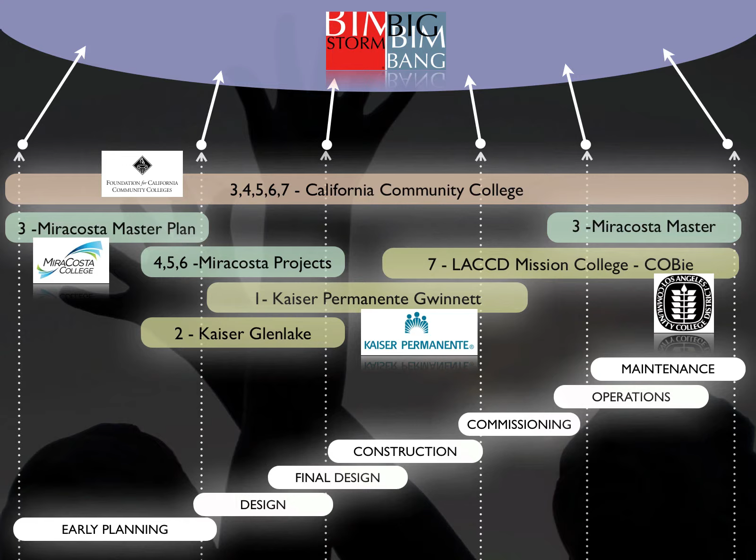We have recordings from previous webinars, but we outlined the types of projects being focused on in this BIMStorm. We have the MiraCosta Master Plan. We have 2 projects from Kaiser Permanente, the Glenlake project and the Gwinnett project. Gwinnett is under construction, Glenlake is in early programming. Los Angeles Mission College is focusing on COBie, going from construction into facility management, and the MiraCosta Master Plan is ongoing in draft format right now.

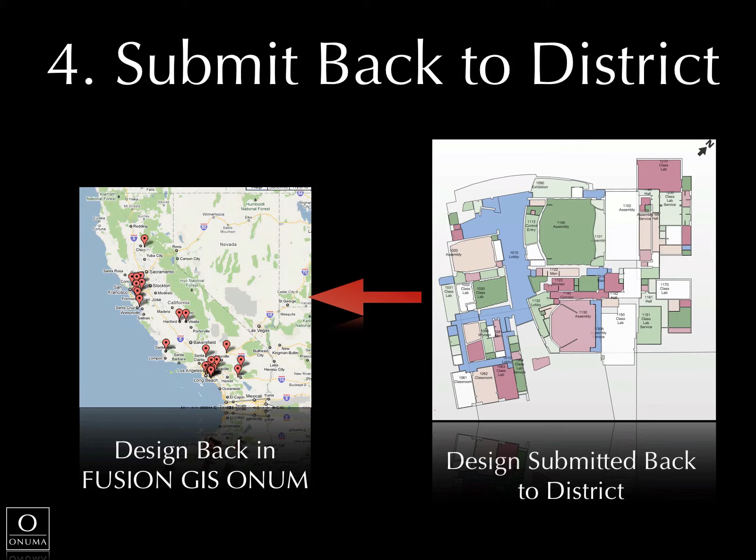In the California Community Colleges, we have a lot of districts. We're focusing on 2 districts, MiraCosta and Los Angeles Community College. Today we will be looking at programming. There's 2 projects on MiraCosta where we have programming requirements going into design. Those are being submitted as part of the BIMStorm from MiraCosta in draft format, and the owner in that case is looking for how to review the designs as they come back into the different systems being used and compare the results.

Today we're going to be starting with MiraCosta College. We have HMC Architects, who are the MiraCosta College owners representative for the master plan that's ongoing. It's in draft format right now. Deborah Shepley, the principal and community college practice leader, and Dave Rova, the design principal, are going to be joining us, and we'll be explaining a little bit about where the master plan is.

There's a website actually that's available to the public where you can get the draft version of the master plan, and there's some presentation videos there so you can see a little bit of the background. What we're doing in the BIMStorm is MiraCosta College has allowed us to use this information as a background to define the projects that we're going to be focusing on. There are actual projects defined in the master plan, but in the BIMStorm we're using them as a way to engage the teams to participate.

So Deborah and Dave, are you ready to speak? Certainly, great, yes, we're here. Well, thank you very much for joining us. Maybe you can give a brief introduction of who you are, what you do, and what you've been working on at MiraCosta. Then we'll open up the plan and take a look at it together.

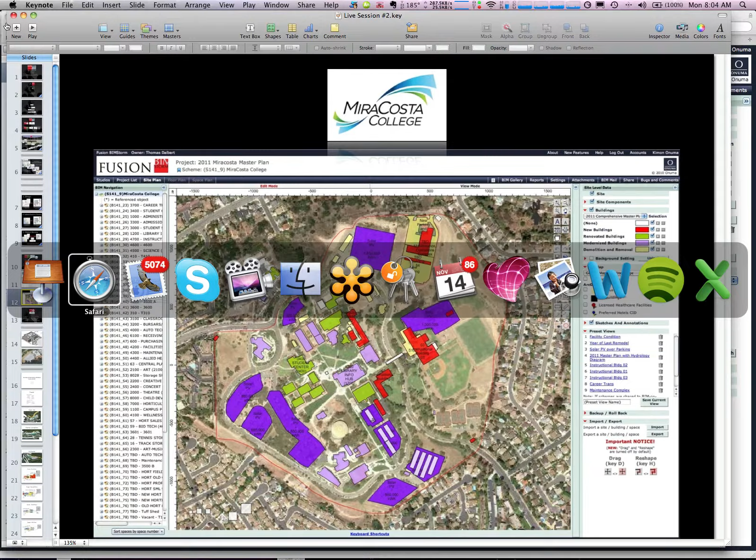Sure, I'll start, this is Deborah. About a year and a half ago, we were hired by MiraCosta College to develop the comprehensive master plan, and it's comprehensive in that it involves both the educational planning as well as the facilities master planning. We are in the final stages of this comprehensive master plan. In fact, the final report was printed last week and will be brought to the board this week for approval.

So just a couple notes: the master plan is a result of a lot of forward-looking thinking in terms of not just the facilities and the campuses within the district, but also where the educational programs are going, where the enrollment is going, and what their big institutional goals are. All that information, because the first half of the planning process is really focused on the educational plan. We worked with the Collegiate Brain Trust under the leadership of Eva Conrad leading that effort, and then we've translated all that information into the recommendations that you see on the campuses right now in terms of what will happen to each of the 3 campuses within the district.

So on the plans, we basically have recommendations for new construction, renovation and repurposing of existing space. A number of buildings have been removed, and there are a number of site improvement projects on the campus as well.

I'm not sure how much more you'd like. Well, that's great. Maybe I could ask a few questions and kind of frame...

The planning scenarios we're setting up here: what we see on screen is an image from the master plan inserted into the tools we're using to organize the BIM storm, the Onuma system tool. We also see a blue outline identifying the focus area. We're not looking at the whole campus, though it's available for reference. We'll be focusing on two buildings: instructional building III, basically an athletics facility gymnasium, and the maintenance operations building for facilities, plus an area identified for potential solar photovoltaics.

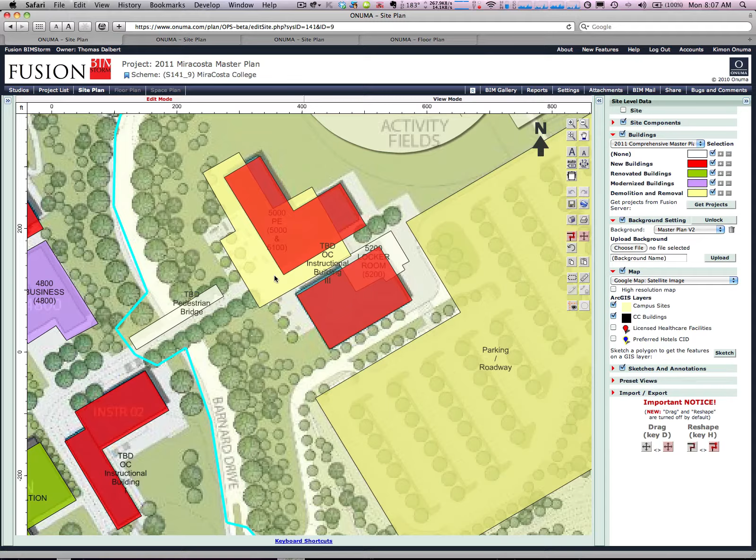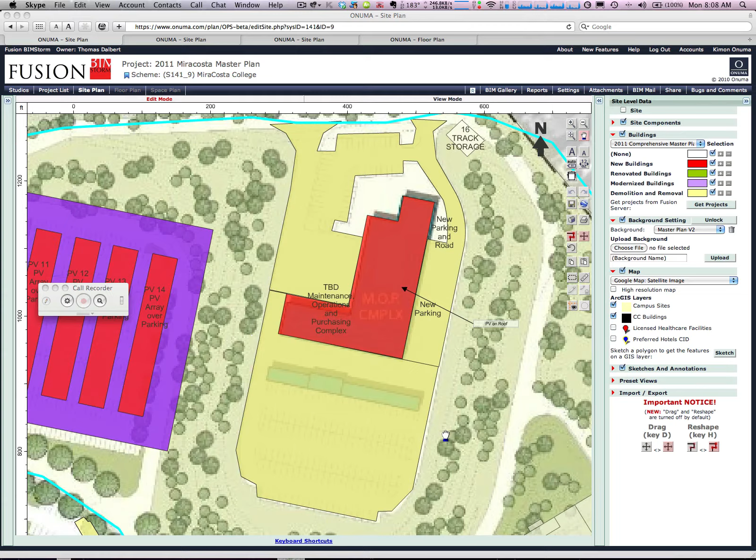The maintenance and operations purchasing complex is interesting because it's sitting within what used to be a stadium, or what is currently a stadium bowl. The college wasn't using that land—it was a track and field, but very underutilized. If you look on Google Maps, you'll see the sloping seating area all the way around. It's a really interesting spot because that's been the recommendation for where the new maintenance and operations complex will go, to utilize that area and pull it out from the middle of the campus.

So the interesting part is looking at the visual connections and also the vehicular and circulation connections within that bowl over to the campus.

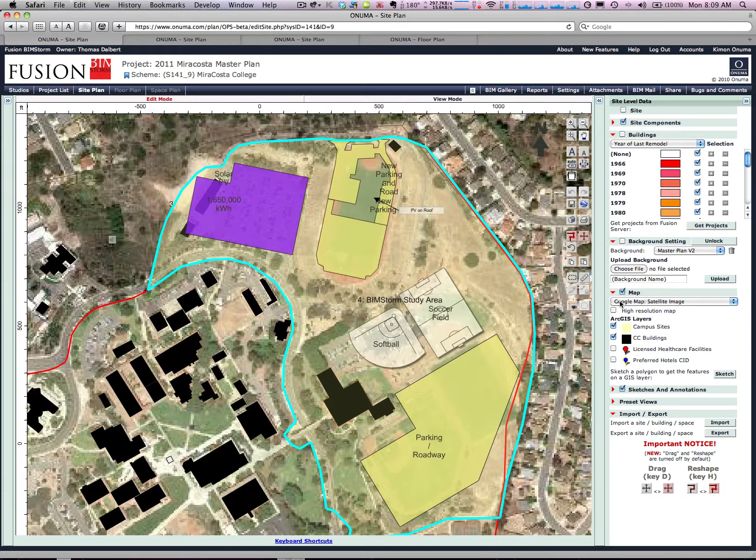And Dave, anything you'd like to add? Yeah, again, in a master plan, we're talking about setting a stage—setting up something for the future as well as plans for today. Architecturally, what you'll see in the models and in the BIM storm right now are really diagrams of locations of these buildings, with a little sculpting, but in reality these things will be brought up as projects in the future. So what we've done is set ourselves up with this stage to create something the campus really desired from the beginning: destinations. Not just destinations of instructional space and academic program, but also destinations for students and student life.

So as we're replacing a bridge that connects two parts of the campus, it really isn't a bridge anymore—we're creating a terrace, an area where students can gather and have a sort of classroom outside the classroom. We're separating buildings and creating massing that would stage terraces and plazas in front, to make it a much more active zone.

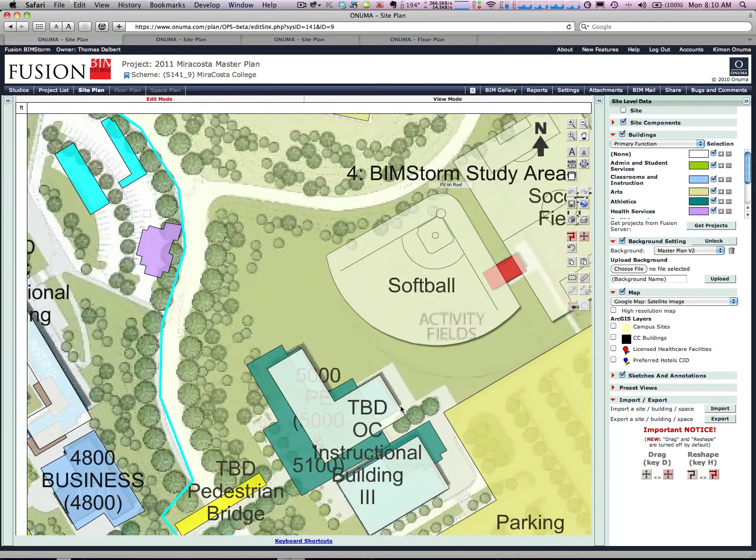The area we're concentrating on within the blue—this instructional building—is really a gymnasium and dance studios and areas like that which are active, and it would be able to draw students to this area and these facilities if we were to create more indoor-outdoor spaces, not just interior programmatic spaces.

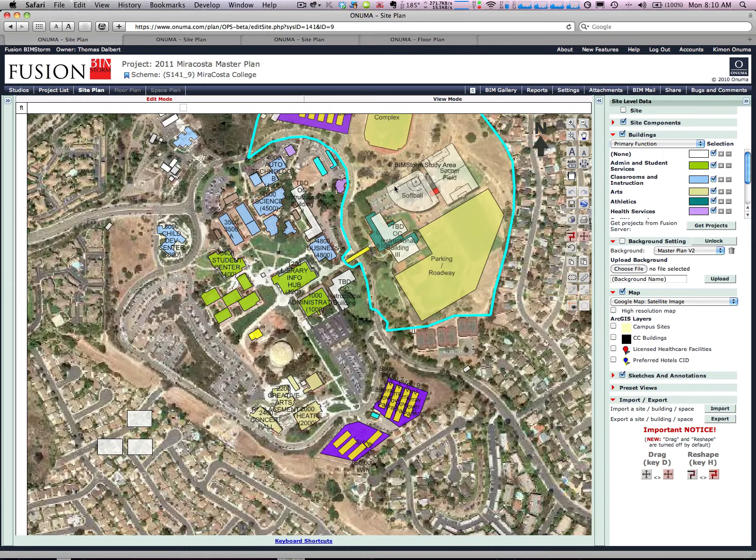This new master plan really links the campus. If you notice on the Google map, we now have large parking zones that connect not only on the perimeter of the campus but also in the area we're dealing with. So these connections of people and program are really important here.

So as you're looking at this, really think about it from the clientele perspective and the stakeholders—from the students to the faculty—and how these areas are really staging themselves. How's that?

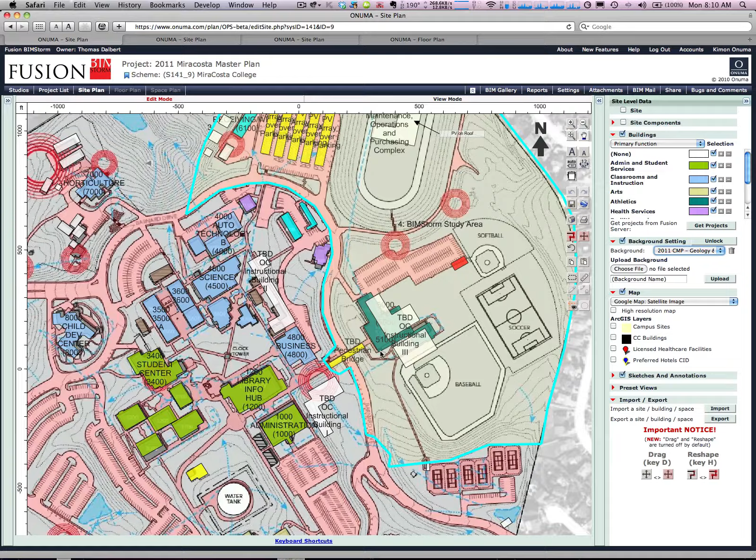Kimon, is that the level that you're interested in? Yeah, that's great, thank you very much. Any specific questions? Yeah, it triggered some questions based on what you were just saying.

You mentioned the pedestrian bridge, the link. It's actually a very interesting bridge because as you're entering the campus, you notice this bridge, you drive underneath it as you're coming in, and then you loop around and get into the main campus. So it's kind of an entry point. Is this part of the plaza? Can we assume that this bridge can be part of this project, as teams can work on it as a design element?

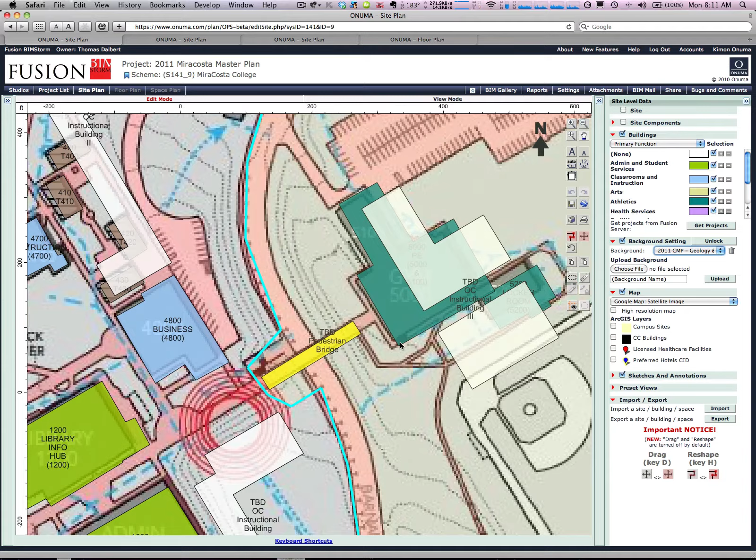It is a design element, that's correct. And it is within the blue area, so as you have it shown, it does show like it would be part of it. Because the plaza in front of the instructional building then reaches across this wide bridge, which is more of a plaza. That's a very interesting kind of design element.

The other thing, just so the teams realize, there is an existing building here that is in disrepair, and is proposed to be replaced with this new building, the instructional building number 3, which is an athletic facility.

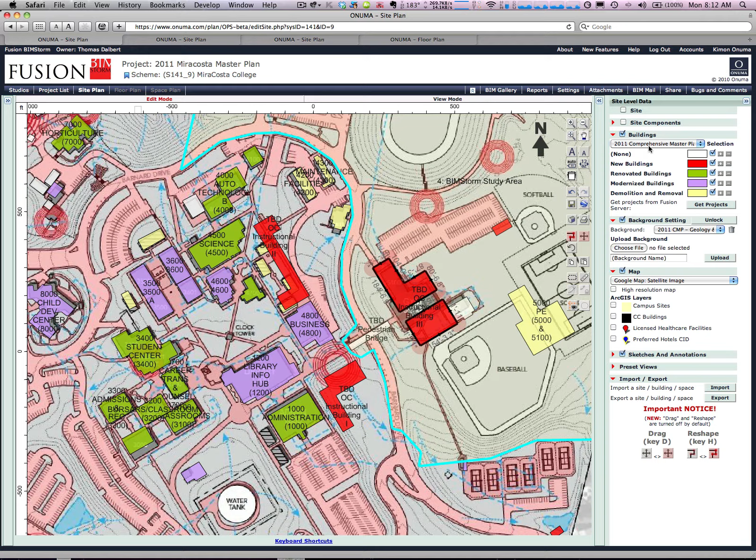So that's kind of part of the exercise here, is how do we update this, make this bridge part of that design element, put this program in for the new building, site it correctly so it fits within the planning document that you sent me last week, so it shows the connection between the existing campus and the proposed building here.

And so this existing facility is actually going to be, we can basically just place it off to the side here. This is going to be demolished.

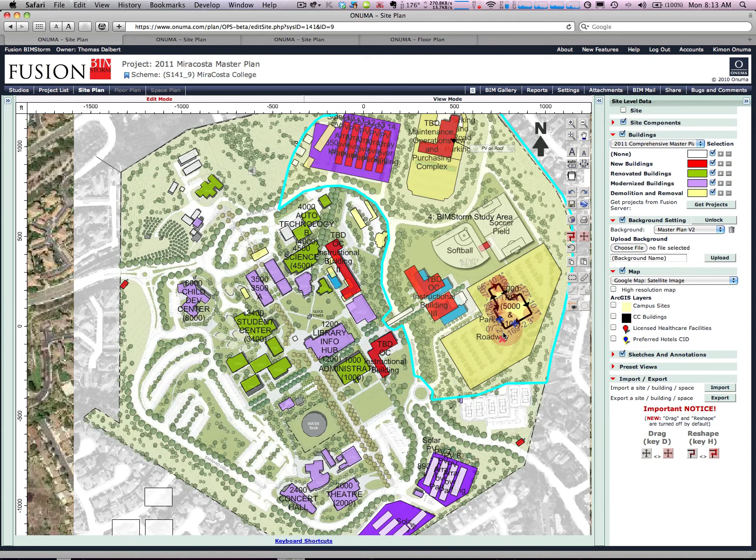Yes, and Kimon, one more thing on that. We've actually staged this or phased this portion of the project in the master plan so that the existing facility is in operation while we are building the second portion of the facility, its replacement, or the gymnasium portion and locker portion. Then phase 2 would be demolition of the existing facility and then bringing in the dance studios, fitness training centers, offices, conferencing, and all of that.

Okay, that's interesting. So we have this proposed facility in red, the existing one in yellow. Are you suggesting that maybe the gymnasium portion gets built first while this one's still in operation, and then it phases over to this part? Yes, that was in the plan, yes.

Okay. All right, we have to look at some of the alignment here because this is always a challenge when you have a lot of different background data. We have the Google map, and then we have the image. Let's turn on some of the higher resolution Google map. So we're trying to get things in alignment.

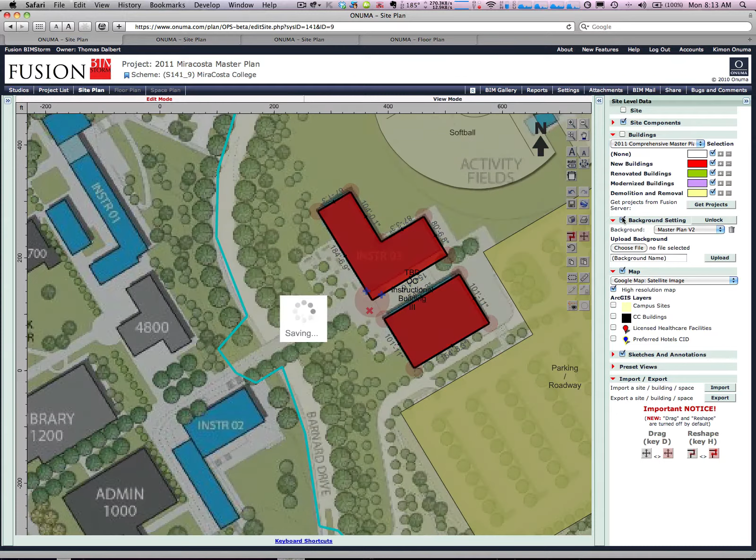The other thing that's interesting on MiraCosta, that's a correct pronunciation, by the way. I guess I was correct last week. It's MiraCosta, correct? Yes.

There is actually GIS, or Geographic Information System, data available. We don't have it shown here in the map yet, but hopefully we're going to get some more detailed data that might show us the exact alignment of the bridge and the buildings.

So this proposed building, the idea is that it would be on axis with the pedestrian bridge, and there's an existing building shown here, and I'm not sure if this is the exact location. We're using the GIS data that's available from the district to place that. So there's some study that needs to go on about how the sequence is.

So that's a very interesting thing that you talked about, of keeping the existing building in operation while this new one comes in.

We also understand that there's a realignment of the ball fields here that are right now in what's marked as proposed parking. So the parking is coming in here. The ball fields are moving to the north of that. I think we discussed that solar...

Kimon, this is Young. Let me just interrupt you real quickly. I think your screen may be stuck, so you may have to... I'm not sure if you're changing your screen, but nothing else is happening. Oh, okay. How's this? I just refreshed. You can see the master plan on it.

Okay, what do you see now? No, nothing is happening. Okay, there we go. Oh, that's strange. It was stuck, I guess.

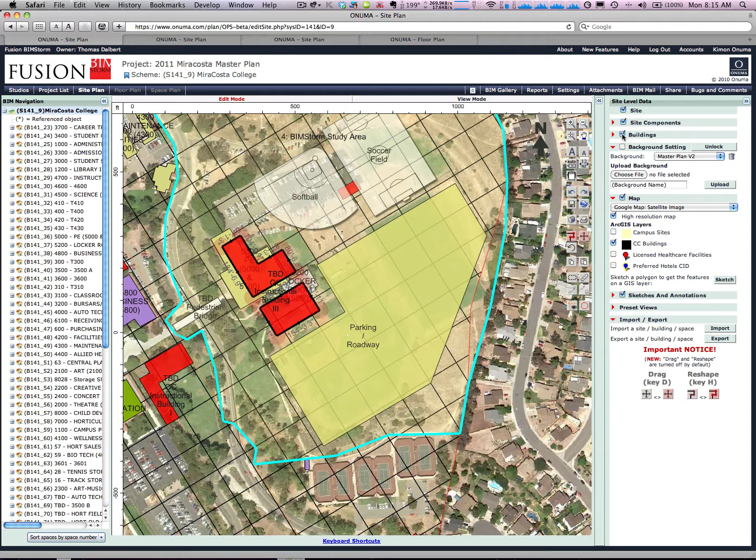So I was talking about this existing building, the proposed building, and the bridge across, and the existing versus proposed parking that's taken over the existing fields. If we turn off the background map, we can see the existing fields are there, but the proposed fields are actually moving to the north.

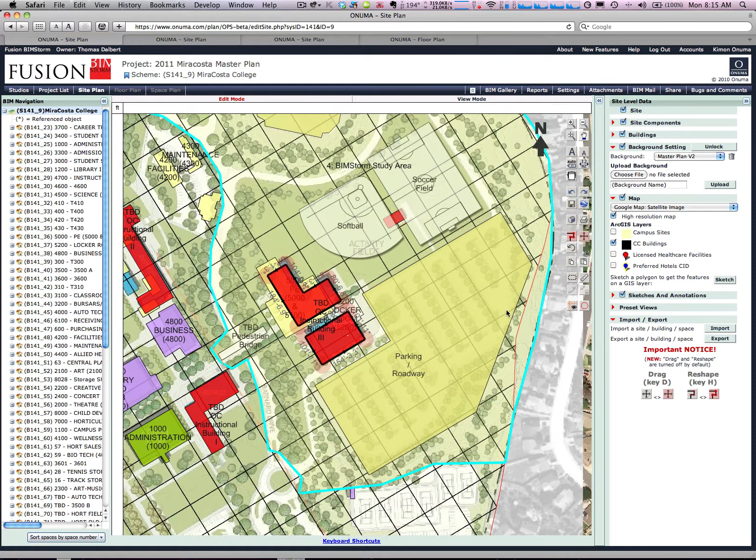The parking has taken over the existing area here. Deborah, you mentioned this parking area is not open for solar photovoltaics because of potential issues with the neighbors, so we're not proposing solar PV on this parking, but we are proposing it on the northern parking area up here. Let's move on to that.

The purple area here is proposed solar photovoltaics. There was a question last week from an engineer in the audience saying the alignment of these is probably not optimal if this is truly north, so it's a question of how to configure them, whether east-west or north-south, and that's going to be up to the teams to propose. We just placed them here as a concept for this project of placing solar photovoltaics.

In fact, the layout of the parking lot, as well as the whole design of the PVs, is open. And it extends beyond to the left area where that purple is, because those tan buildings are going away, so there's more room there.

So we could say it's possibly better to go this way, since these tan buildings are being demolished and moving away, giving us some more area there. This is another study area for a team that is very familiar with how to lay out parking and solar photovoltaics.

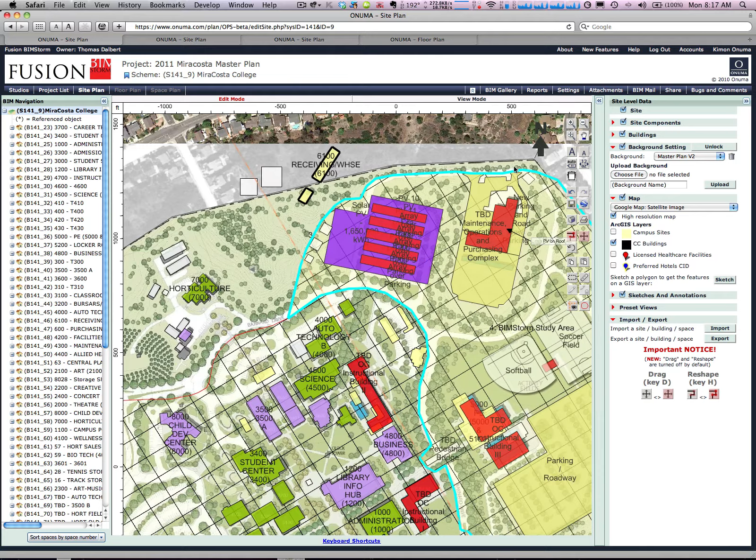Keeping in mind, there is an important access and circulation to the top, off your screen right now, that connects over to the maintenance and operations complex. The road continues above and then down across the back. You're talking about right here?

Yes. So the circulation on this whole study area is interesting because there's vehicular circulation, new parking, new buildings, this bowl area that the maintenance and operation building sits in, and an upper area for activity fields.

So how does the whole vehicular and pedestrian circulation work on this side of the campus? There's an axis defined in your master plan for how this parking area connects back to the main campus, so there's a very interesting dynamic being set up for the teams here.

All right, let's see a couple more things here. So we have this set up in the Onuma system. This is going to be made accessible to the teams, and the workflow we're studying is kind of interesting. This also just came in the last couple of days, but the way the community college sets up projects for funding and defining projects, they're called initial project proposals.

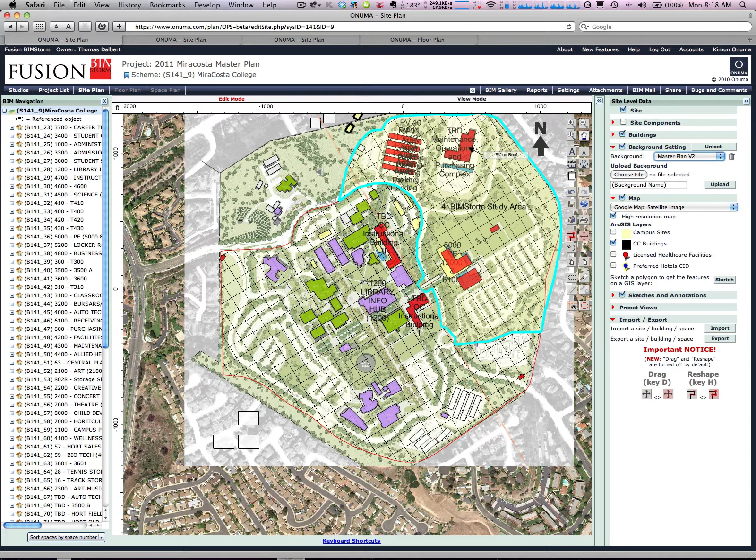Let's see, there's a question coming in. Is this the latest site plan? If so, what happened to the athletic field, baseball, soccer? The athletic baseball and soccer fields are being moved right here - the new location of the soccer field and the new location of softball or baseball.

Yeah, go ahead, I can answer that question. Those fields show how that area could be configured, but the activity fields are meant to represent activity fields to be determined. What's happening here is they're changing some of their fixed fields and creating more multi-use athletic recreation areas.

So on the master plan drawing, right now we see softball and soccer. That's not specifically how it would be laid out. It would be more like what's shown on the master plan drawing you had prior - as an open field area where multiple activities could take place.

So like this - not really a layout like this, it would just be an open field here. Correct. So we could actually probably remove these, but they do show up as a suggested area, though it's a big open area basically that can be multi-purpose. You can understand the scale by bringing those in.

The other question was, since you have a sloping area, why not stack the parking to free up more athletic field space? I'm assuming this question is talking about the area over the maintenance and operation building - this is a bowl here, correct? Or are they talking about this area here? I'm not sure. It's probably the area to the front or below the red new building.

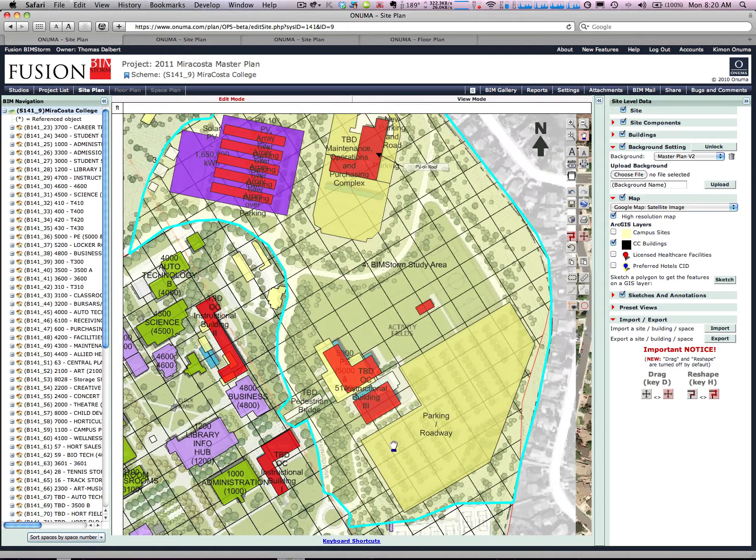Right here? Within the bowl. No, further up, in the bowl area.

During the planning process, that entire bowl was looked at as one area to create structured parking. But due to the cost, it was chosen not to pursue that, although it might be something to consider in the future.

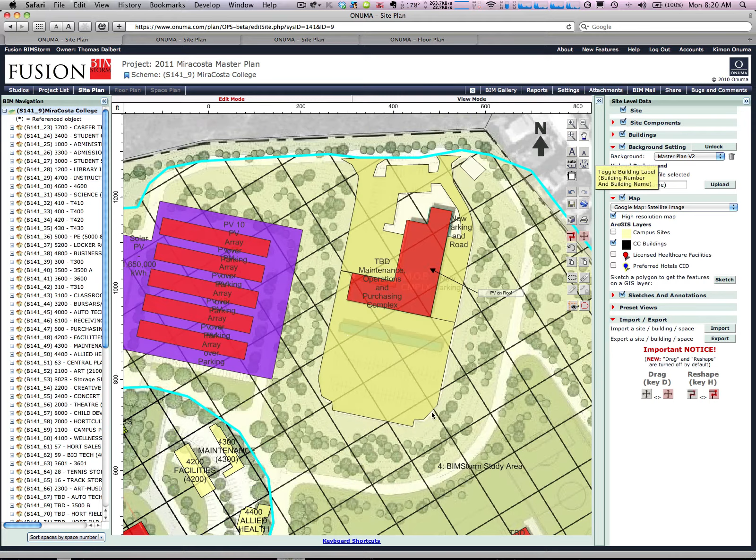They were able to get the complete target number of parking just using surface parking, which is much less expensive and more cost-effective. So the solution was not to build structured parking, but that area is being held in front of the complex just in case it's needed in the future.

So there's some studies that could happen there as well.

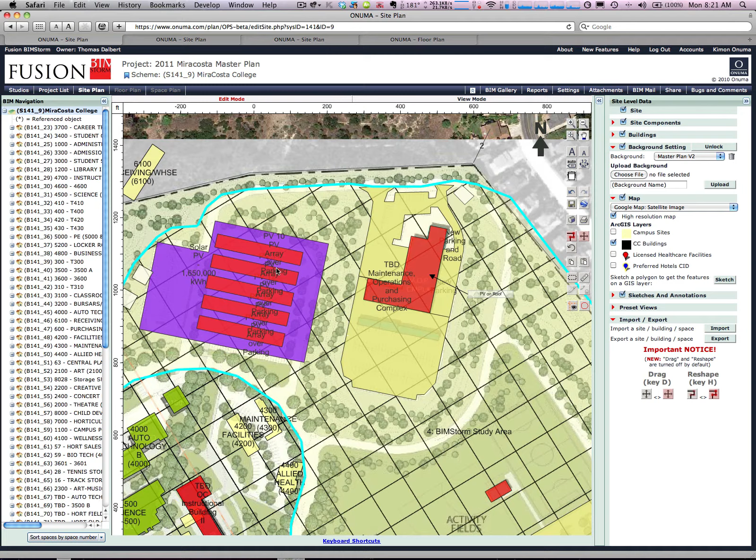The goal of the BIMStorm process is that as a team starts submitting their designs, if somebody has an idea and says here's what we think could happen here, it'd be great if you guys from HMC can respond and say here's some issues with that approach. Yeah, we can definitely do that.

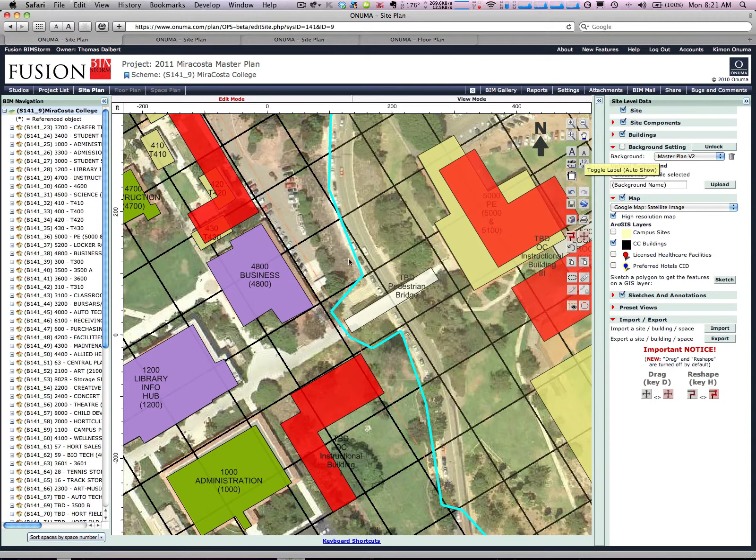There was a question about the location of the bridge. The bridge is right here, with a road underneath. The bridge goes across from the main campus and leads into this athletics area here.

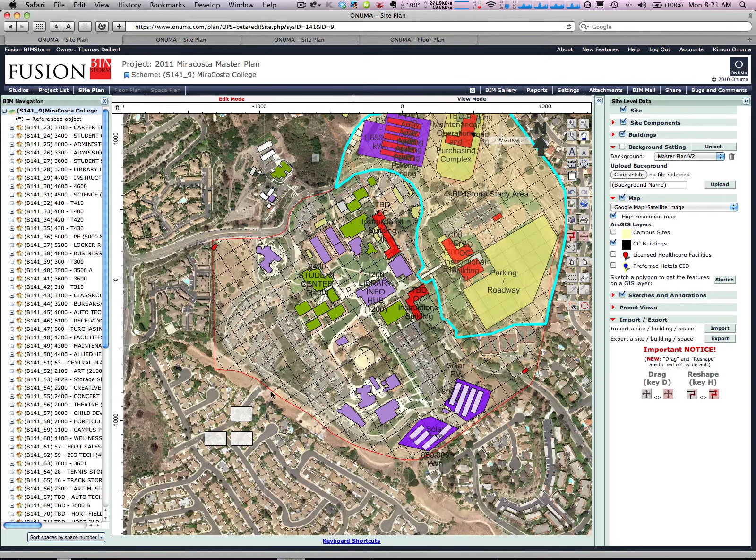Another really important part to this workflow is that the Foundation for California Community Colleges manages a system called Fusion, where planning proposals are submitted.

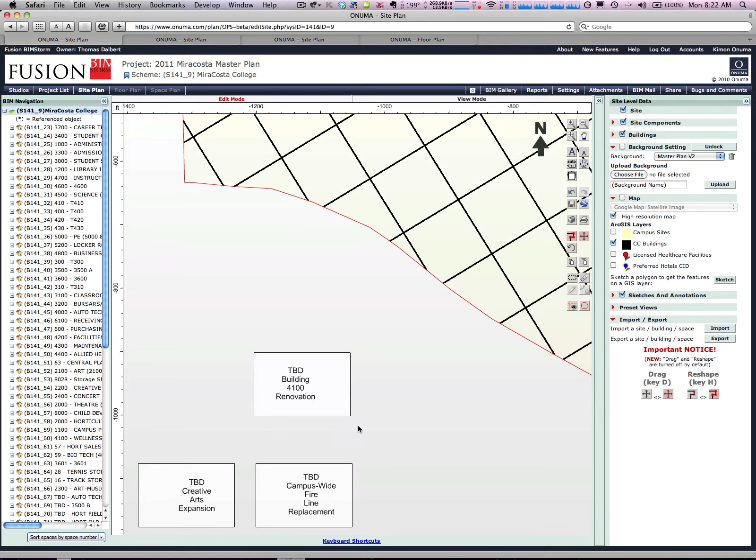These planning proposals come in as these blocks here. So there's a planning proposal for new buildings coming in, and also these red buildings. The data for these buildings is actually coming from their database directly, and it automatically generates the blocking and stacking model, which looks like this.

This is actually updated from last week's session because we got the new planning proposal data. This is the athletics building and the actual spaces inside that building.

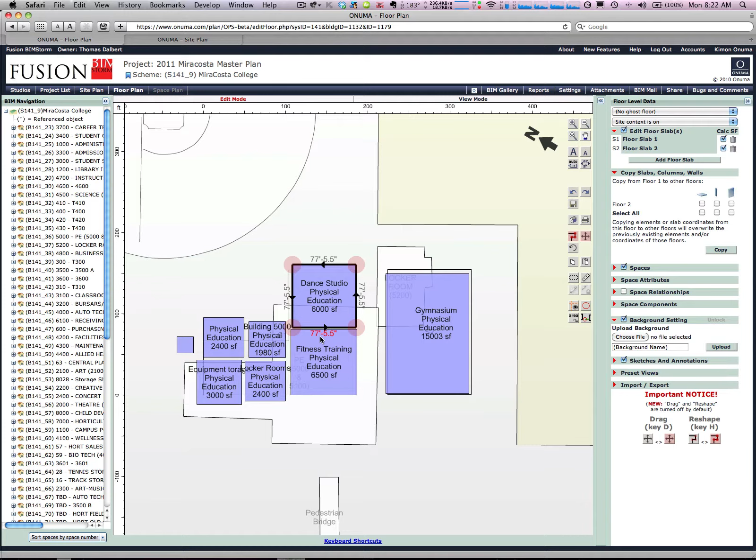We would like the teams to use this as a starting point, either to continue this discussion about how we phase the gymnasium with the existing building, or to take this out into other planning tools like Revit or SketchUp and continue on. The main thing is we want to track the requirement of how many square feet these spaces are as the team starts working on the design.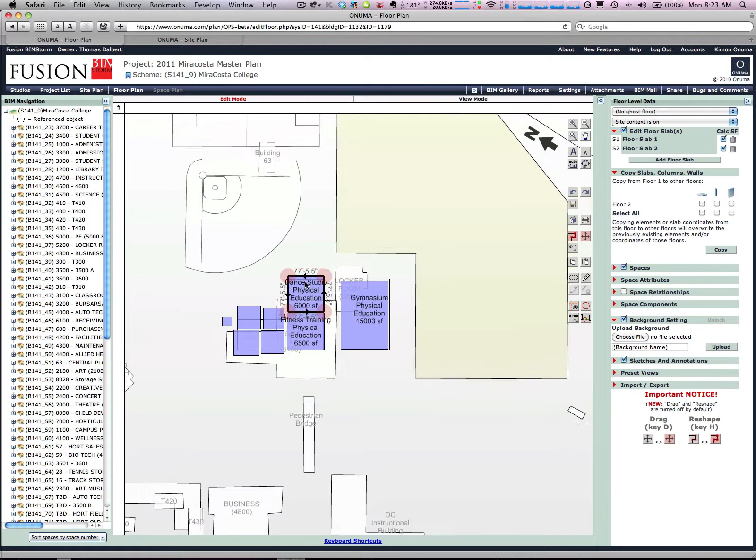This is available for both the athletics building and the maintenance operation building. Later this week we will be giving access to this project to the teams now that we have the more detailed data available.

We have the discussions going on about the planning scenarios here. We'll be posting this discussion we're having right now as an animation on the BIMStorm.com website.

So I think we should move on. Let's see, were there any questions? I think there are other questions out there, but I think we'll move on and try to address other questions toward the end so we can get through the other parts of this webinar.

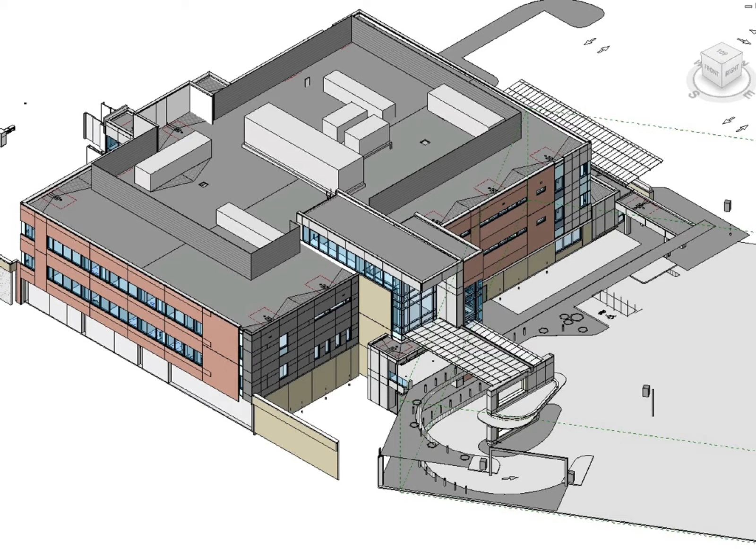I'm going to be meeting with the Vela team in Boston this week at Build Boston to discuss more about these kinds of workflows. The whole process of going from BIM into commissioning the building and then into facility management - Vela has tools that are very powerful in collecting that type of data from the field. It's pretty exciting to see all this stuff coming together.

I think being able to share what this project is doing is really important for the industry and for the BIMStorm. That's one of the goals we have here, to see what we can do with this data, and having Vela involved is very exciting.

Yeah, there was one other thing I thought of since we talked last. The other thing about how we set the project up is we had the mechanical engineers hire the mechanical subcontractors to do the drafting, so that we would try to minimize coordination and modeling costs by the engineers of record and the subcontractors. So the subcontractors drafted in AutoCAD MEP and other versions.

One of the issues we've had is getting the intelligence from those so that they could create their spooling models in the AutoCAD MEP back into Revit, and how we combine all of that as we move forward into getting our engineering and operations team a good intelligent model for the future.

That's actually a very interesting question, because one of the other projects in the BIMStorm is the Los Angeles Community College District Mission College, which I'll be showing a little bit of today as well. They're almost at the same phase now - they're in construction, and they're getting ready to release a specification of how you take data from construction into operations if it's not even in the BIM.

That's actually a very important question, because there's a lot of data coming in during construction that would not be in the Revit model, for example. There's a specification we've been working on with LACCD that defines that - how do you consume data from the Revit model, plus how do you get data from the field, from other parts of the process that might not be in the BIM?

So it does not necessarily all have to be in the model, and we can explore what that really means as we look at the other projects. That's one of the goals of this BIMStorm, to cross-pollinate, because the issues relating to this Gwinnett project are very similar to what's happening in LACCD. I'm hoping we can have interesting discussions on how that could work.

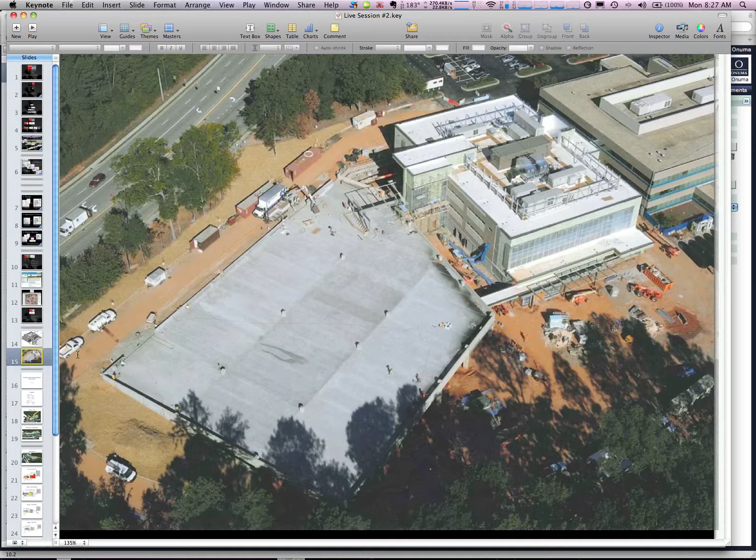The other project is - we just received this information recently from Glen Lake, and this is kind of the program, a project that's in programming phase right now. Do you guys want to talk a little bit more about that? I have a few slides here, then I'll show some live information as well.

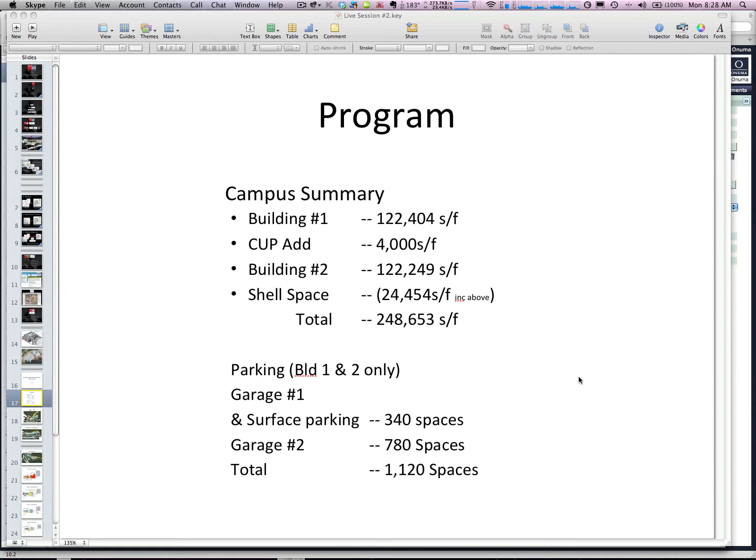Sure, this is Steve Cox. The project's coming into the SD phase, so the program's been somewhat finalized, but we're roughly looking at a project in the 120 to 130,000 square foot range, with various adds, and some shell space was added to the project. A whole floor was added in shell space just in the last month. The project is moving into SD, and the figure and shape of the building is coming together.

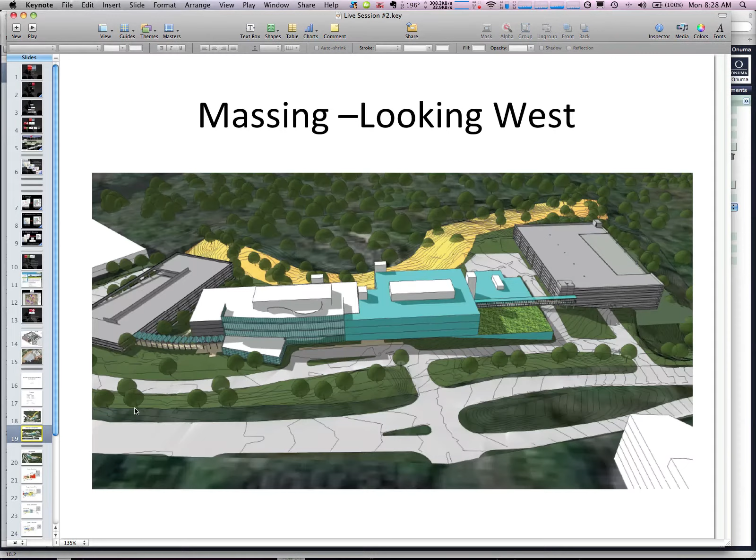The exciting part for us is that our scope of services was pretty clear that we wanted to define all the mechanical systems up front, and the architectural team with their mechanical engineer are doing that now, which is somewhat unusual for us - we usually end up doing that in the DD phase, and we're now doing it in the SD phase. That's really being driven by BIM and the needs for BIM to establish that stuff early. The same can be said of the civil.

This is the first project we're modeling in civil, so it's progressing very well and early. The best thing I can report out of this project is that we've established a program, and we're really starting to kick off our BIM process, and it's early in the project. That's something that's new, but everybody on the team is very excited about that.

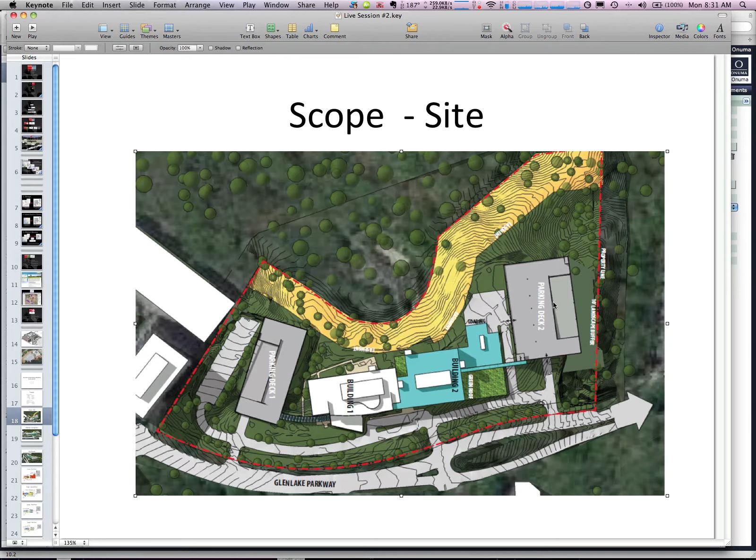I guess it's this one here, the Glen Lake project. The parking, I believe, there's existing parking on the left and proposed parking on the right. I don't believe there's parking underneath building number one. Is that correct? That is correct. Parking garage number one is existing, and the white building number one is existing, but it will be about half renovated in this project.

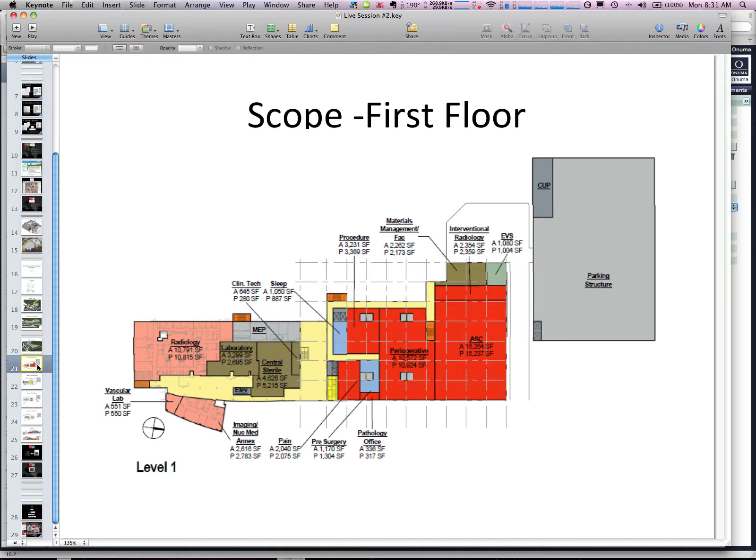So building number one is kind of a renovation. One of the buildings, building one or two, is a partial renovation, and the other is a new building attached to it. Building number one is kind of a restack and renovate project. And building number two is all new.

So building number one is on the left here, and building number two is all new, and then there's a new parking structure to the right of building number two, that's about 750 spaces.

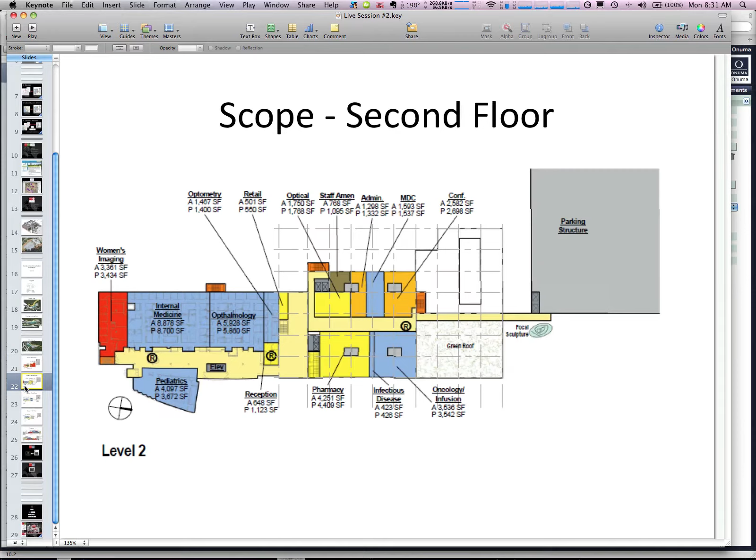And we have a preliminary blocking and stacking diagram that we received, and I'll show a little bit of the results of that because we also received an Excel file that has all of this data, the programming requirement data for Glenlake, which we will share with the teams as well.

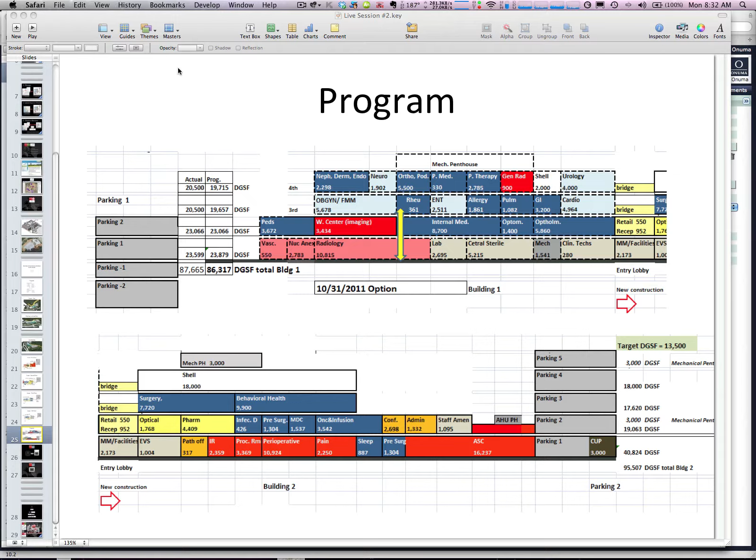And we also took that into BIM by importing it into the Onuma system. So we have a blocking model, in fact, let me show a little bit of that because that could be interesting to see. So we have a couple things.

There was another question that came in, will there be a sandbox available for testing of the FM CMMS sandbox? And yes, that's the intent. We want to be able to try and get some of this data into a format. Specifically, COBie is one of them that we want to see if we can move data from design and construction into CMMS. Participants who log in and are part of this project can get access to that.

So here's the Gwinnett project. We actually started importing some of the Revit models and things that are coming in from the Kaiser team in there, and we also parked the programming requirements.

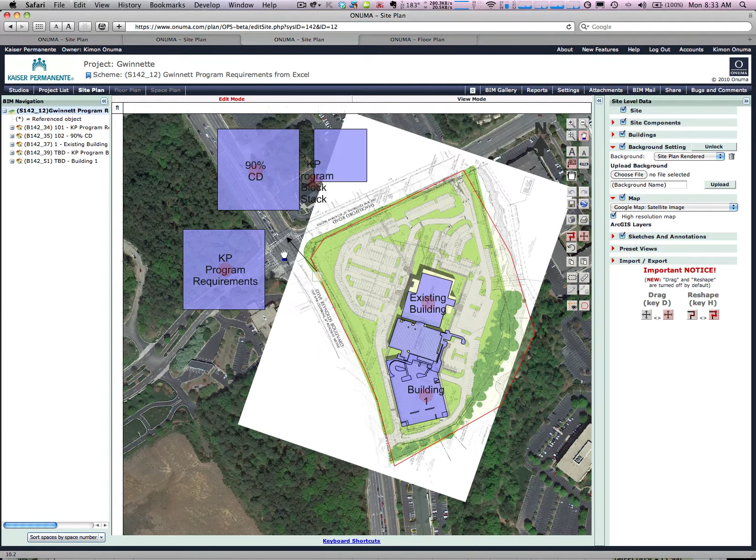One of the workflows that we want to show is how programming requirements coming in from Excel compare, well here were our requirements, now how's the design matching up to that? More of that's going to happen on the Glenlake project because we're in the programming phase on that, so we will have more data on that.

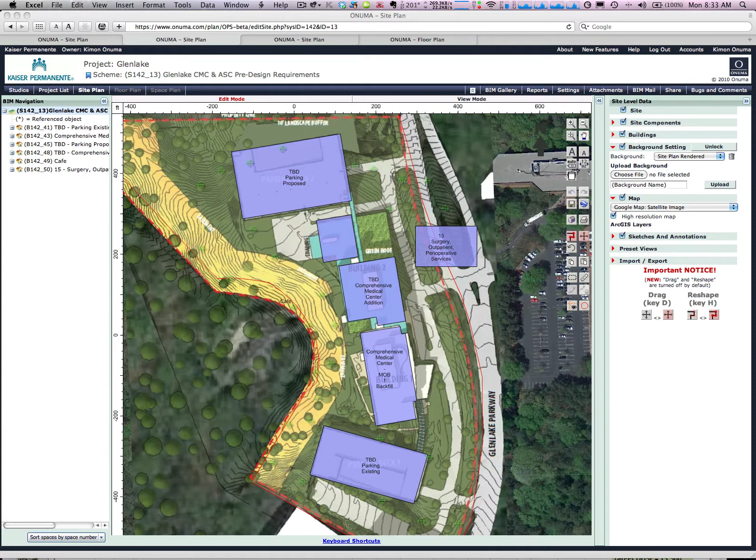So here's the Glenlake project. What we did receive, let's see, the programming requirements from Glenlake were in an Excel format, and it looks kind of like this. It's actually a pretty intense Excel document with multiple tabs for each department. The first tab has a summary, a space summary of the different departments. There's 23 departments, here are the departments listed right here, the square footage, the department number, and some other classification of functional groups information.

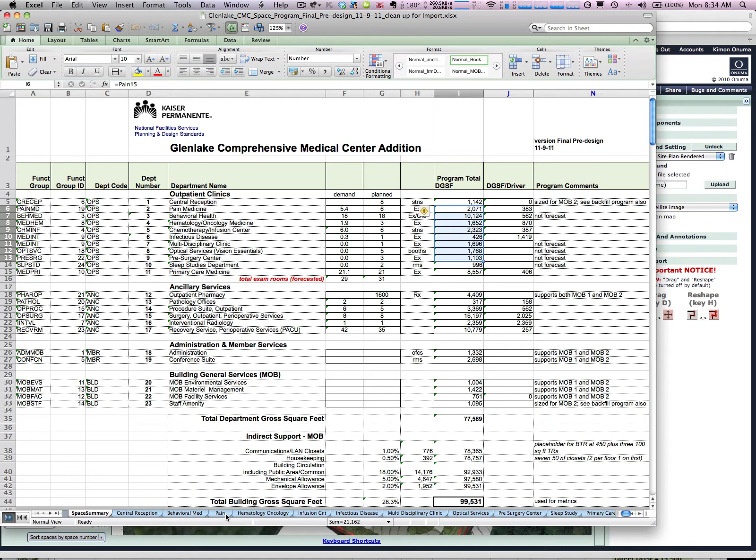And then each of these departments has a separate tab that goes space by space and identifies the space, the square footage, and how many spaces there are. So teams can, in the blocking and stacking phase, the diagram we saw earlier is more focused on a departmental view. Some teams could just focus on using this data, which is much more straightforward than diving into hundreds of spaces, although there could be some teams where, in previous BIM storms, some said they want to focus on one department and go down to the room level and lay that out.

So what we've done is we've taken the background image and put it into the Onuma system with the site plan. We've brought in the buildings, and we've imported the program, like the comprehensive medical, for building number 2.

If we open that up, it actually has the Excel data that came from Glenlake, blocked and stacked with the actual data and ready to be used in BIM. So the teams that participate here will actually be able to pull this into Revit or other BIM applications and SketchUp and do the planning studies.

We layered in the background data here, and here are the spaces. There's still some questions about where these are located, but that's part of the planning process, is back and forth to understand where the owner wants to place these spaces.

The same thing for addition number 2, and then also we took one suite, I believe it was surgery outpatient rooms, and actually went down to the room level. So we've translated the Excel file into this blocking and stacking model that will be available for the teams.

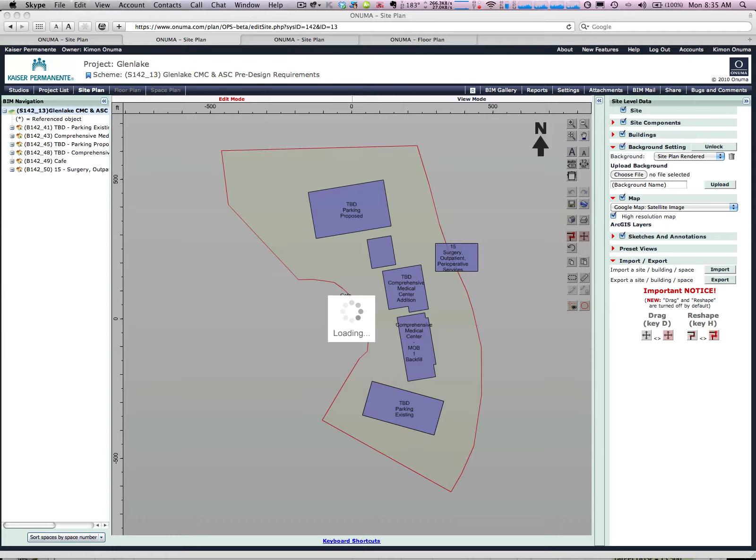Okay, I think we have some questions here. Can you describe the technology used to do the blocking and stacking diagram shown? Okay, what I just showed you is in the Onuma system. We set up the Excel files and automatically generate the blocking models.

There are other tools, other team vendors that are involved with the BIMStorm. There's Trelligence that's also going to be involved that has a similar functionality. We are going to be parking the programming requirements in the Onuma system, and then we're going to be showing connections back to Trelligence and Revit and everything.

The intent here, it's called a blue dot and a red dot in the Healthcare BIM Consortium that Kaiser is involved with. We want to see owner requirements and track them through the design, all the way from the early planning to the design and even into construction.

Okay, the original requirements in the Excel file say that we need a certain kind of room, and those rooms need certain kind of functionality. How are we tracking that? You know, the air changes, the temperature of an operating room, for example.

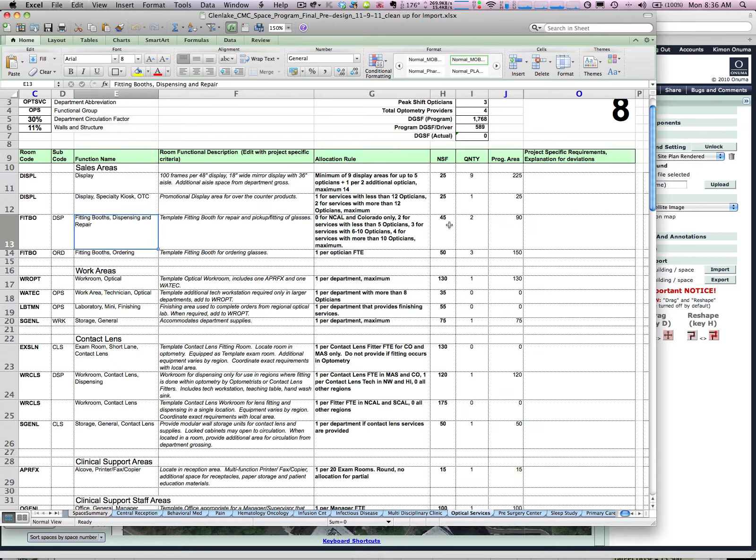That's a BIM. At this point, it is a BIM in our world because we want to see how do we track these. And if you look at this, there's literally thousands and thousands of pieces of data. So it gets very complex as the project goes on to manually track this. So we want to show processes that help to track the data in a BIM format as the project progresses.

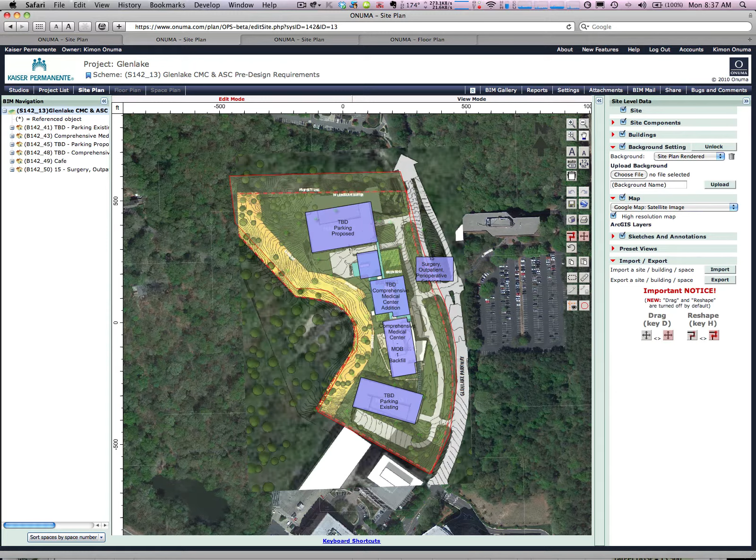Okay, other question. Our web TMA solution is COBie compliant. I would be happy to provide a demo solution of Sandbox for TMA's CMMS solution. I guess this is from Wade Quinton. Yes, we're definitely looking for other COBie tools that are out there, or BIM tools that can tie into all of this, and that's the intent of the BIMStorm, is to show connectivity and to test different ways of working.

Okay, let's move on to the next. Unless there are any other questions, we'll be posting a lot of this stuff. There's a lot of data, obviously. But for participants, when you jump in, you'll get more and more details on this. Kaiser team, was there anything else relating to what we just saw here?

Yes, Kimon, this is Xiaojun Lin. You pretty much touched on most of the stuff that we were very interested in seeing the result of.

One more piece I'd like to add is in both of these projects, in addition to extracting the BIM model information into, say, an FM system, we are also very interested in looking at taking the information that was starting from the design space program level through design construction phase and then back into a space management system, right. Something like Archibus or something similar to that.

Right, and again, at the same time, arrange the information so we can basically have something to organize the information against, say, something like a COBie category, and then to see if that's actually something efficient that we can then, at the end of the day, bring it back into our space management system as well as our FM system, because they are currently separate, without having a lot of manual processing.

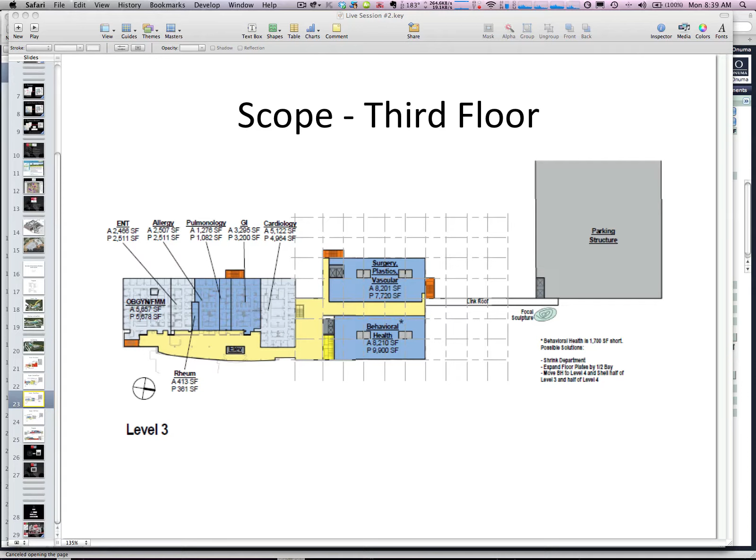Okay, great. Let's move on. We want to get Dennis Shelden on right after this, but before Dennis comes on, I want to show one more thing. This is the LACCD project from Mission College. I don't know if Tina, if you're online, you can say a few words here too, but this is Pankow. Construction is in the middle of construction of this project, a design-build project.

LACCD is using this project to test COBie workflows. There's a specification of how data can be captured in the design and construction process to flow into facility management systems. In LACCD's case, they're heading towards SAP. So how do we get data in a neutral format again into COBie that goes into SAP? That's part of the specification of this.

This is actually the model imported from Revit, the programming model basically, but it's actually the same model that Dennis is going to show us next. Tina, if you're on, do you want to say a few words before we move on, or should we go on?

If you have time, or do you want to keep moving? Say a few words. Yeah, that's great.

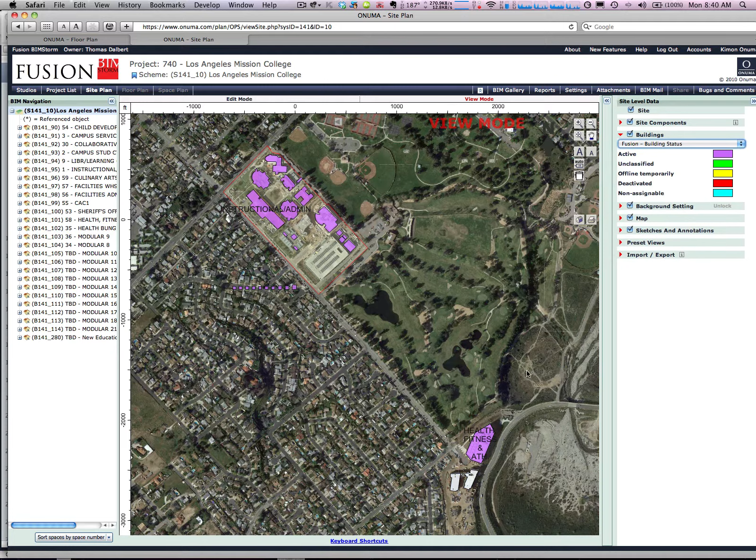Sure. So basically, the owner has a $6 billion bond program going on, and they realize that there's a lot of information coming in, and they want to get that information into their facility management systems and also integrate their GIS and their energy systems. So it's a pretty big effort that's going on here.

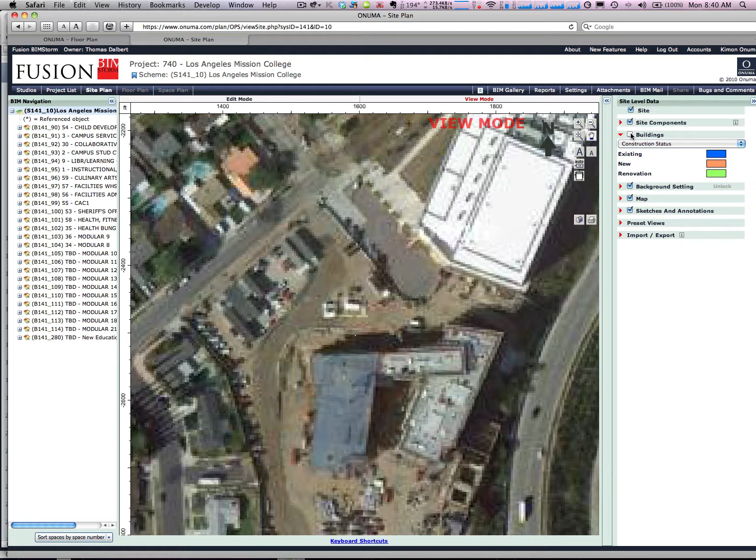The part that I've been specifically working with the ONUMA on is identifying what is the information that is gathered in the design and construction phases that needs to transfer into the facility management phase, and how do we transfer that data. I think we're really realizing that the planning begins right from day one. How do you structure data so that you're moving it along the entire process and not recreating it over and over again? And what is that ultimate data that the facility management team is going to need to manage their facilities? And then also, what do they need if they need to renovate in the future? So it's really understanding that everything that's being generated and how to get it in and constantly use it.

And it looks like some of it's in BIM. It looks like other of it is in some type of data processing format. So we need to structure that data so that it's exchangeable between all the different systems that are being employed throughout the life cycle of a facility.

Perfect. And that's actually a very important point, because what was asked earlier by the Kaiser team is how do we get data from a project that is in BIM that might not be in the BIM. During the construction process, how do we get data into facility management that might be coming from other sources? The message really is that it's a hybrid approach. It shouldn't be required to be all jammed into the model, because a lot of things happen during construction. There might be data being delivered about a piece of equipment that, if it's in a structured format, we can get it back into COBie format and into the facility management tools.

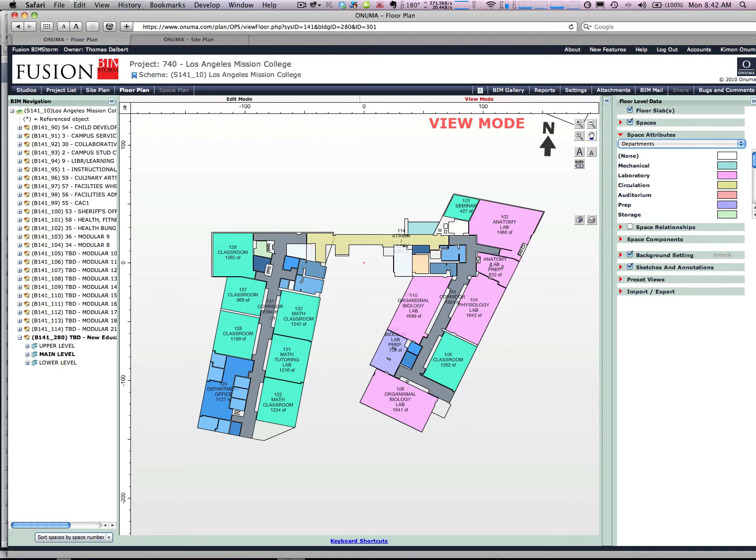Alan Edgar says we should encourage people to start using the OmniClass Table 13, which, yes, I agree with that. Everything here is kind of also tied to OmniClass, the COBie specification as well. So there's a lot of these industry standards that we don't have to reinvent. And if we all start talking the same language, then it really facilitates this flow of information.

Okay, let's... Kimon? Yeah. Kimon?

I also think it's really important for everybody to recognize, we start talking about these OmniClass tables, and they're kind of in flux. We're on to our next version of OmniClass, which didn't keep the same format. So it's a little bit of a struggle implementing them while they're still being developed.

Yeah, that's always a challenge, and we brought that up ourselves too, that if these standards are shifting, it makes it very difficult for owners to implement. So this is actually a perfect venue to put that out on the table and say, here's what we're struggling with. I'm glad you brought that up. That's always a challenge with all these standards. How do you make it work?

And I'm very excited this year to have Gehry Technologies introducing their new tool, GTX, which is a web-based model server that in real time can visualize and share very detailed models. So we're connecting this process with the ONUMA system, where we have these programming models, for example, that say here's a programming requirement, then all of a sudden we have detailed Revit models that come in, or other BIMs that come in that can be viewed in Gehry Technologies, and we can actually have a link across.

So Dennis, if you're ready, we'd like to hear a little bit more about what Gehry Technologies is doing. Some of this stuff is going to be brand new. It hasn't really been talked about, and we're glad that you're part of the BIMStorm as a sponsor and also as a participant supporting the project here.

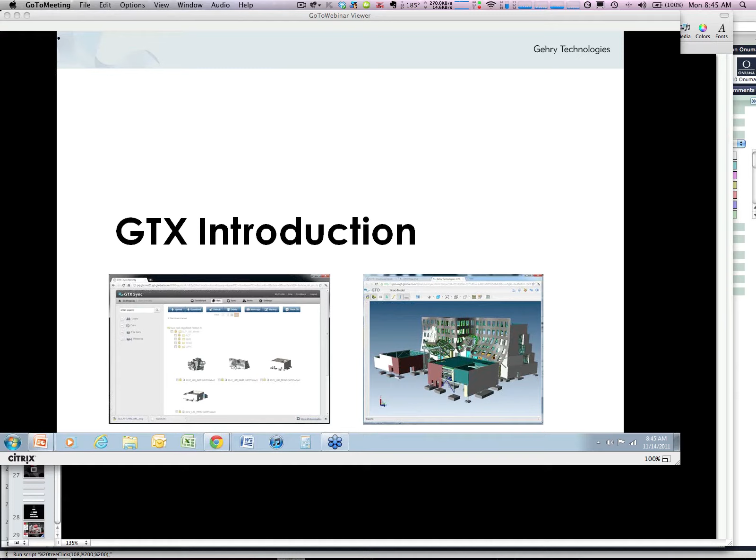Thanks very much. I'm going to give you guys just a very brief intro to GTX and talk a little bit about the ambitions of what we're doing with the BIMStorm, but we're very excited to be part of this. My sound may be a little bad because I'm not on a great internet connection here.

Briefly, GTX is a web-based 3D file management and project collaboration system. It supports BIM through a number of these emergent technology paradigms, kind of cloud-based things. So you'll see aspects of technologies like Dropbox and Skype and Facebook, those kinds of ways of interacting with data, but centered around the building information model.

It's cheap, easy to use, and install and maintain. It's basically software as a service, so you're up in basically a minute. And it supports a range of neutral formats. We're trying to be very neutral, so we support all kinds of different 2D and CAD formats.

We think most interestingly, it allows project managers and other non-modelers to use 3D, and we're hoping also to see this as the technology to manage data after the project is completed.

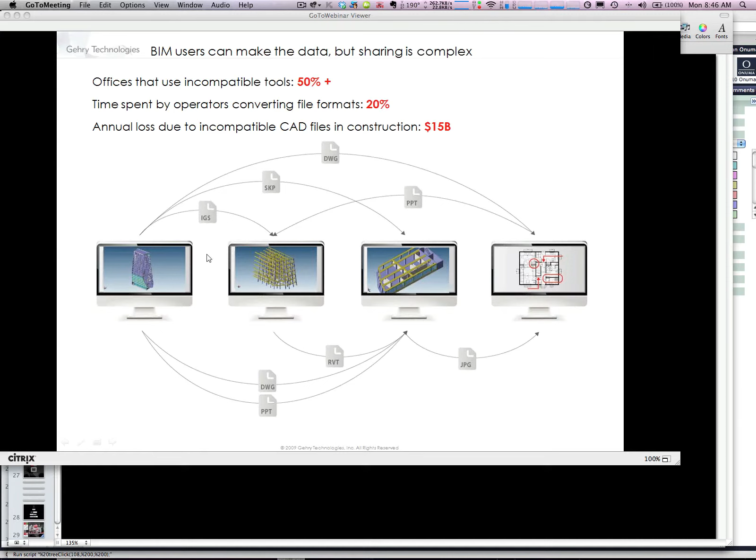This is basically the vision, which is you model in any format, model with any tool, and GTX does the conversion to a neutral object system on the back end. So this is essentially what we're driving for.

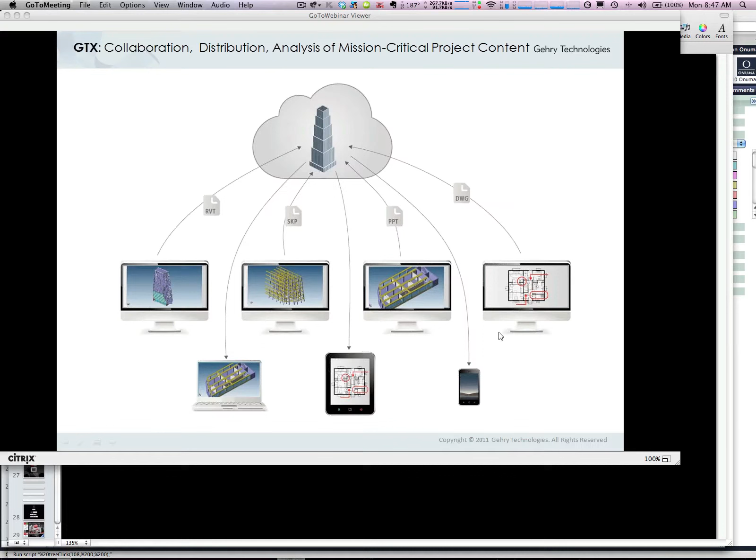You can pretty much model in any technology and then view on any device with the information going up to the cloud. And then from there, GTX supports not just BIM, but a whole bunch of other documents that are part of the project data set.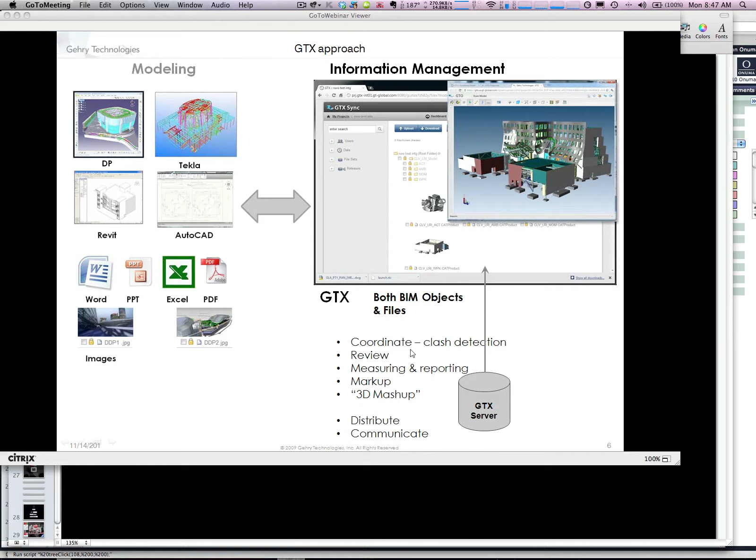Word documents and images, etc. And then we do a lot of the classic coordination and measuring, clash, all that stuff on the cloud.

Let me just, because I guess I burned some time, very quickly go into a quick view of GTX, and everybody who's on the BIMStorm will get an account. It's basically in what's called a beta mode right now.

And we're letting everybody that is on BIMStorm use it essentially through the end of the first quarter of next year at no cost.

These are the project listings, and we've started building up some of the projects already, importing some of the data that we're getting from the owners and the managers.

Just give this... maybe I'll be quiet for a second. Okay, so I guess in the interests of preserving network connectivity, I won't go too much into detail here.

We always have these kind of light 3D previews for every file, so you can very quickly take a quick view of what's going on. And then the heart of this thing is really kind of a 3D and other file.

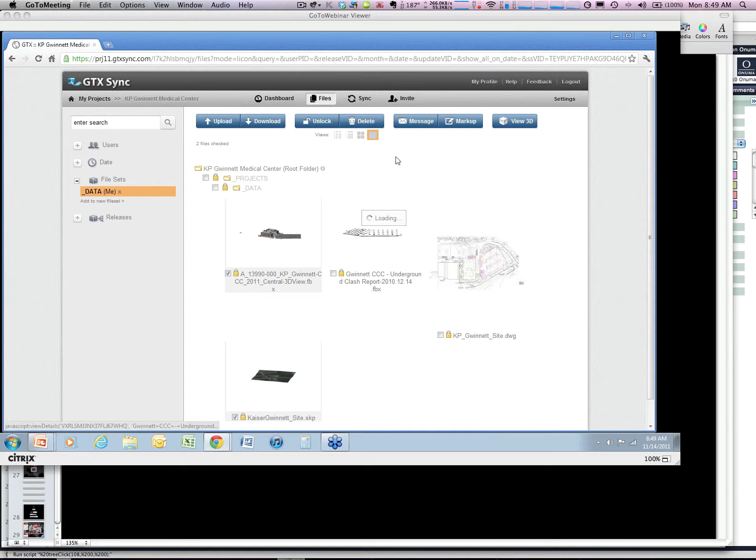I've got the Revit model from Kaiser Permanente. We've got a SketchUp model of the site, and I'll just bring these different models together and say view in 3D. So you don't need to convert one format into another in order to bring this data together. So it's now streaming both files over the web.

I'm just going to let's see very quickly - it's almost done, but I'll just zip over to... go back there, so that one more time.

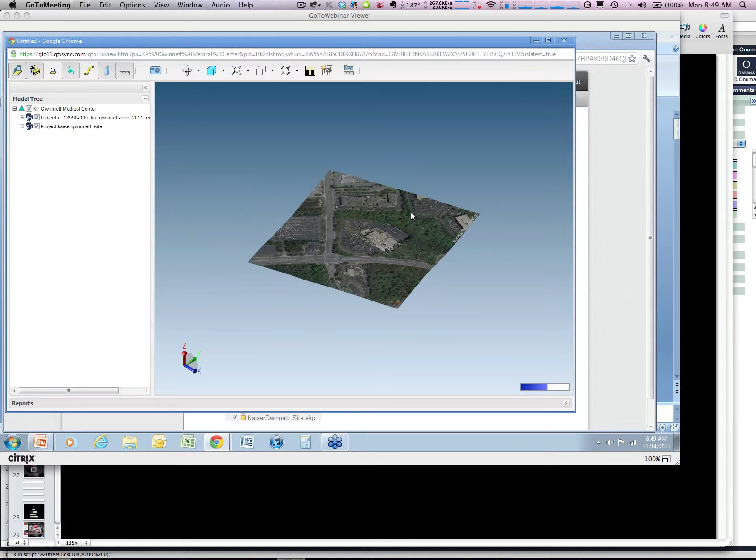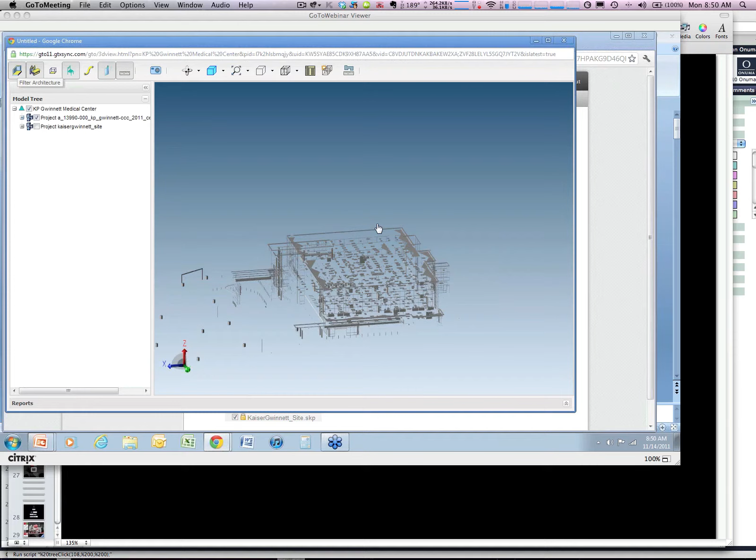Okay, you can see the BIM model and the site model are now coming together in 3D. Very easy navigation of all this BIM information, so I can turn off the site and just show the Revit model. I can turn off the architecture and just show things like furniture and equipment, and then do simple things like quick sectioning.

So if you want to just get a plan view out of the model, there you go. We'll get into a lot more of this later, but the ability to very quickly generate quantity takeoffs and measuring and things like that.

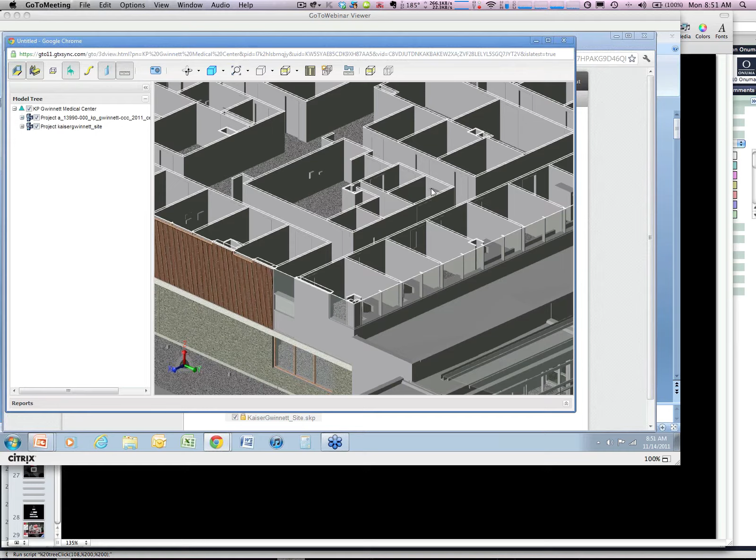I'll very quickly pull up a quick report, and then Kimon, maybe I'll turn it over to you. The goal of our involvement in this exercise is essentially making these data repositories of all the project data. Here you can see very quick quantity takeoffs of different portions of the building, and other types of reports like window schedules, door schedules, and the like.

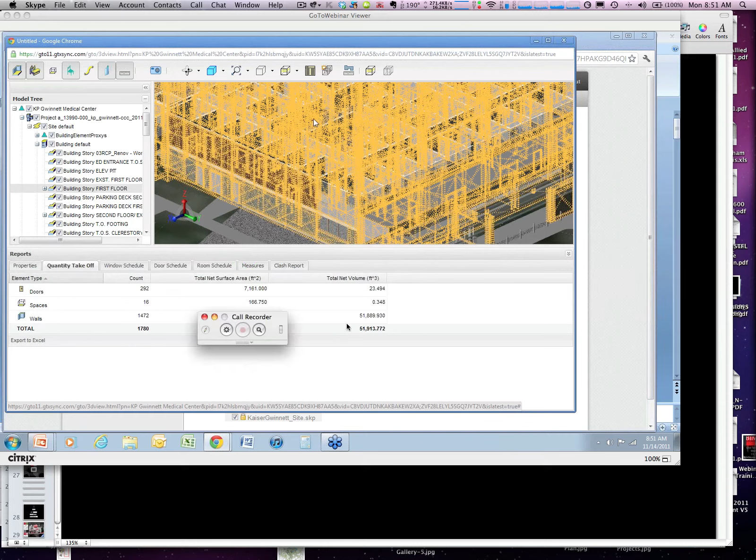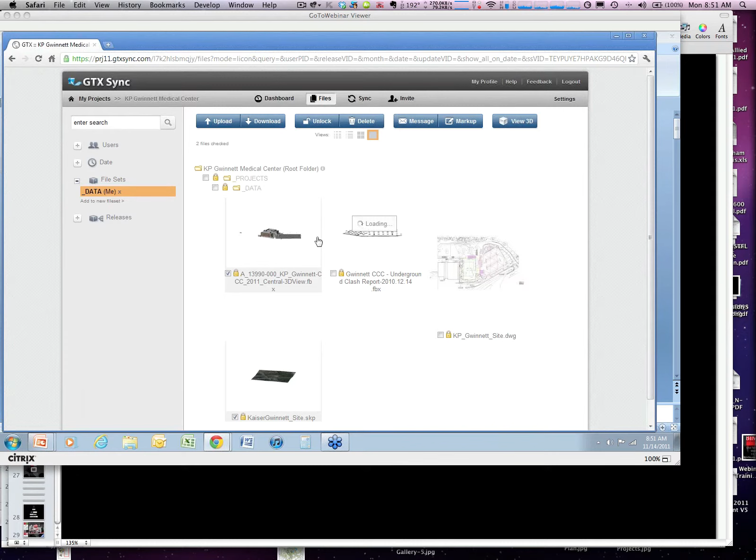All of this can be exported to Excel, and increasingly we'll look at other ways of handling and managing that reported information. The goal is to give everybody on the BIMStorm access to these project data repositories. We're starting to build them up project by project, and then you'll have the ability to create your own projects, your own designs, and your own work in the context of this data, and mash up your project work with what's there already.

Kimon, I don't know if you wanted to show the interaction with the Onuma system that we went over yesterday. Sure, we can do that. We have a few minutes left, but yeah, Dennis, thanks. This is very exciting. When I first saw this, I thought, wow, this is really a game changer.

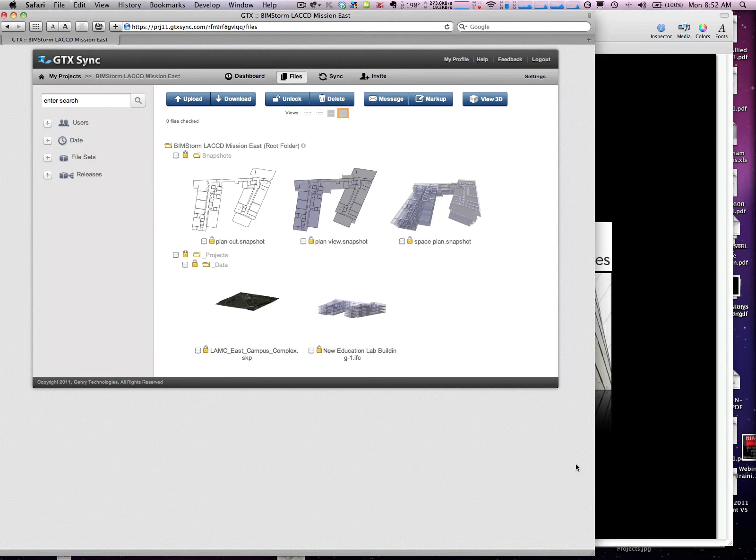One important point is the interconnectivity between different tools. What I showed earlier with this model in the Onuma system originated from the Mission College Revit model, which was imported into Onuma, then exported as an IFC and imported into GTX. So GTX can consume a lot of different types of data, including IFC models, Revit models, SketchUp, and other Rhino models, and mash them all together, kind of like a Navisworks on the web.

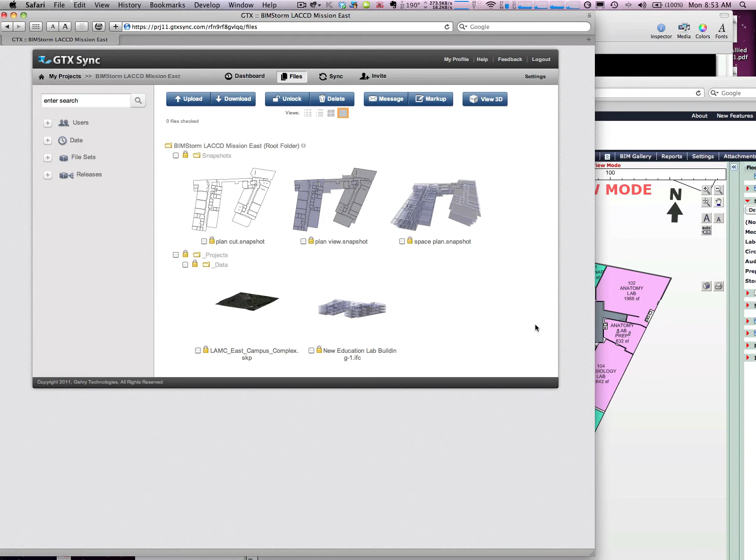The fact that it's on the web makes it easily accessible to everybody. The fact that it has different types of capability, not just one tool or one format, lets you look at IFC models and Revit models together, for example. The other important point for BIM, a theme for BIMstorms all along, is that there are desktop applications that are incredibly powerful and widely used, like Revit, ArchiCAD, and Bentley, a very important part of the BIM process.

But when you have these kind of web-based tools, it changes the whole perception of how you deal with information, since it can be accessed by anybody through a web browser, through tablets, iPhones, and Androids, making it very easy to work together. Did somebody have a question? No? Okay, let's keep going.

We're going to be exploring how this link between GTX and Onuma can function, but one very simple way is to basically have a direct link. So if I know there's an IFC model live in GTX, on the Onuma side I can create a link to that, and because we're both on the web, that link will take me directly to that GTX model. We really want to explore that kind of connectivity, and we're also talking about how to get data back and forth too.

This stuff can move pretty quickly, and when you get on the web, you start seeing many different ways of linking back and forth like this. So on the Onuma side, for example, we have a link to the GTX model, and boom, you click on that and it opens up the model on the GTX side.

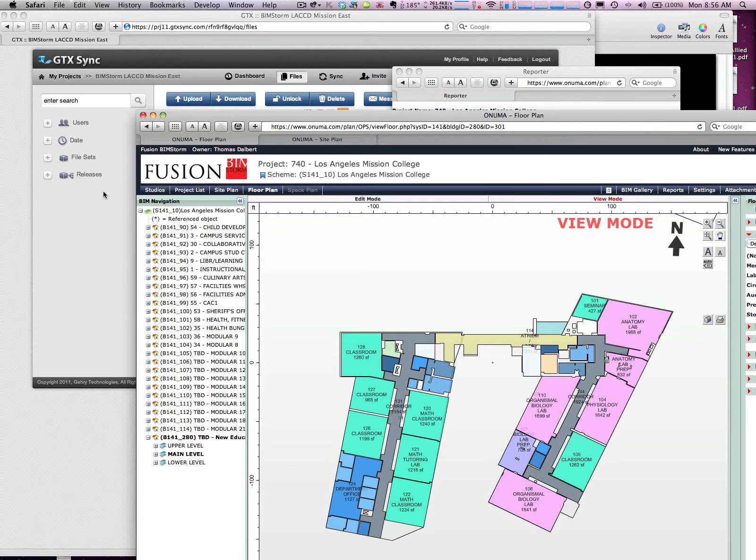Just like you saw with GTX and the same with Onuma, there's many different formats - IFCs, Revits, whatever - and you can merge them all together. Just like we're seeing with the LACCD COBie project, there's data floating out there that is not inside the BIM that the owner still wants to get to. If we require everything to be put into the BIM and then out to IFC, it kind of kills everything. We have to have flexibility to allow even very simple formatted data that's not Building Smart compliant or not IFC to make its way into the building process. That's something a lot of the industry, including many of my colleagues, don't understand yet. It's a big concern.

Part of the BIMStorm goal is that at EcoBuild, we're going to bring these discussions to the forefront and really explore what we can do with this.

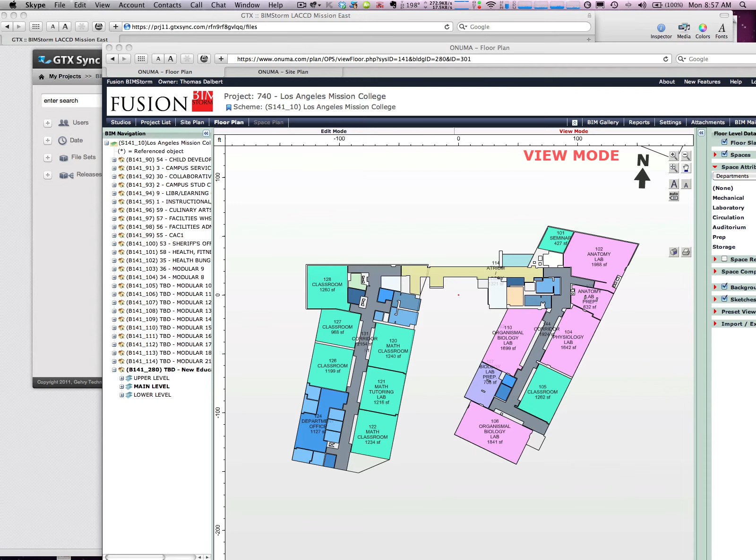I really thank everybody for jumping in. We're at EcoBuild - you don't have to be there in person, but we'll have a big area on the show floor called the BIMStorm Sandbox. It's a sandbox everybody can jump into virtually or there, and we want to explore the challenges owners and the industry are having, interoperability and open standards and data in many different formats - XML, IFC, COBie. It's a very exciting time in the industry, and I believe those participating in processes like this will become leaders. We have to do this together - no single organization or group can solve all these problems, and as we start collaborating, solutions start coming up rapidly. That's the intent of the BIMStorm - we're really merging things together.